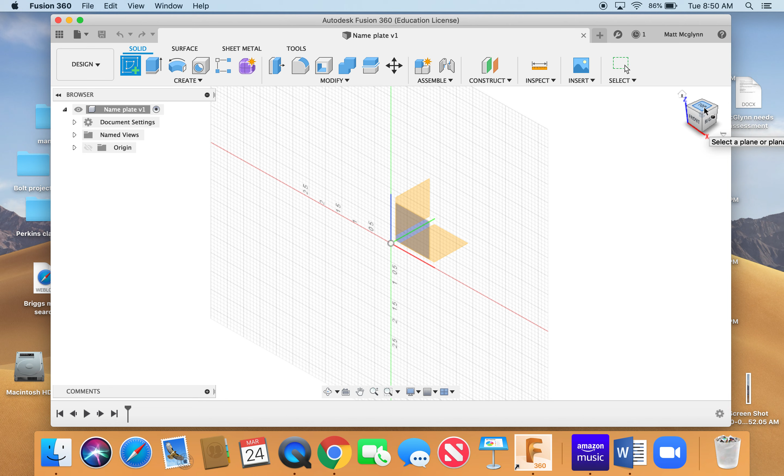Most everything that we're going to do with this one is going to be in the top view. So I'm going to click the top view, and it asks us to, the first thing you have to do when you hit Create Sketch is you have to pick a plane. This little square right here is actually our plane. So I'm going to select that. I clicked on it, and now I'm ready to draw.

If you notice now, all this stuff up here changed to different icons. We're going to start with drawing a rectangle. Now I could pick a rectangle from here, or I could also grab it from here. We want to do a 2-point rectangle.

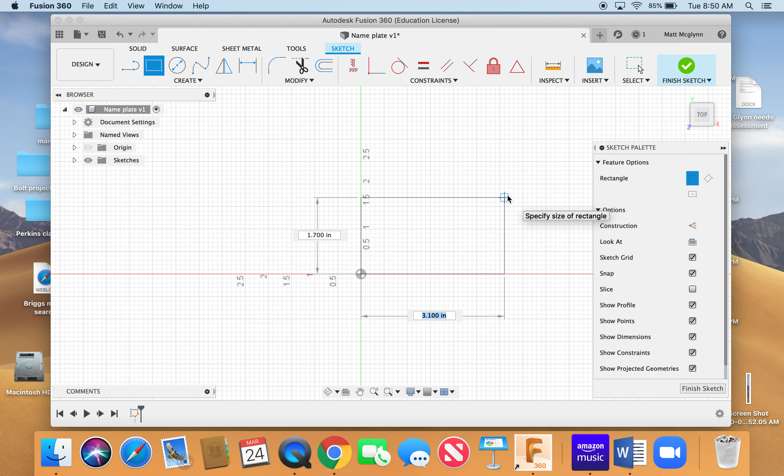I'm just going to go to the origin here, 0, 0, click on that, and start drawing out a rectangle. If you notice, it puts the size in the arrows on the dimension lines for you, and we can just type in the size that we want. So where it says 1.7 on my screen, I want you to do this too on yours: we want a 3-inch height on our rectangle. I hit Tab to get down to the other one, and then we want a 6-inch length. So now we have a 3 by 6-inch rectangle.

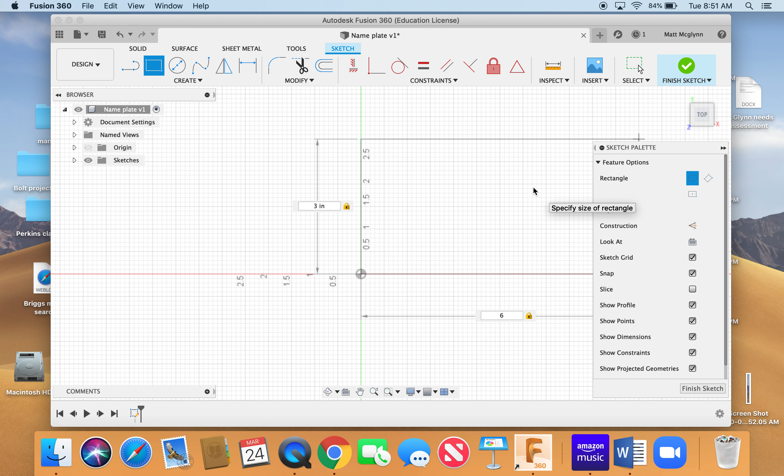After I'm done with that, I'm going to hit Return, and our rectangle's now in space here. If I put 2 fingers on my mouse pad, I can scroll and move this thing around to pan around the screen. I'm going to center it on the screen like so, and now so far we've created a 2-dimensional sketch.

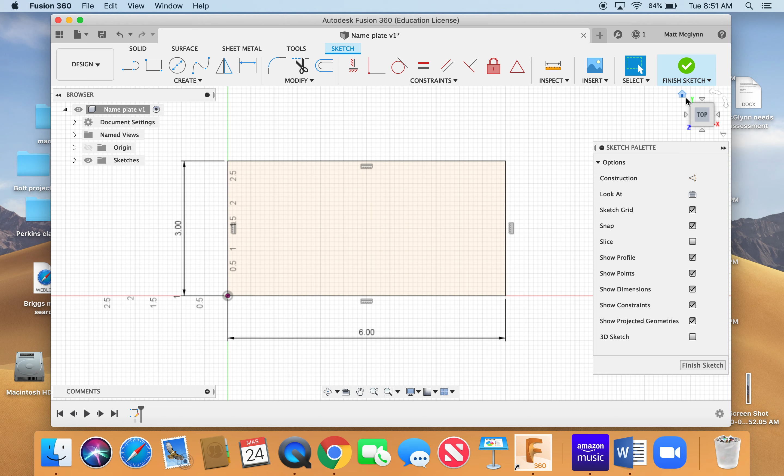If I go to Home right here, you can see that our sketch shows up as just a 2D flat part, just like it should. I'm going to go back to top here quick, and what we're going to do is turn this into a solid piece.

So I'm going to click on solid right up here, and then I'm going to hit extrude. Now extrude, if you look on the information block that pops up here, it says it adds depth to a sketch profile. So basically what we're doing is making a 2D part 3D with extrude.

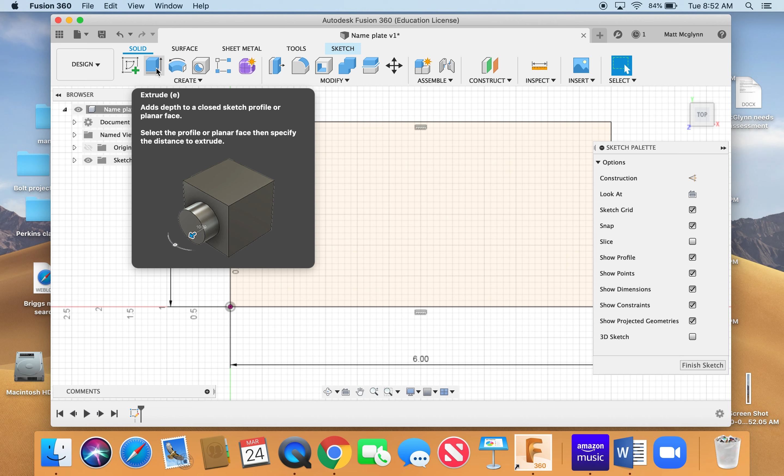So I'm going to click on extrude, and then it asks for the distance that we want to extrude. Basically we want to make our rectangle 3 inches by 6 inches, and then we're going to make it 1/2 inch thick. So I selected 1/2 inch right there, and hit OK.

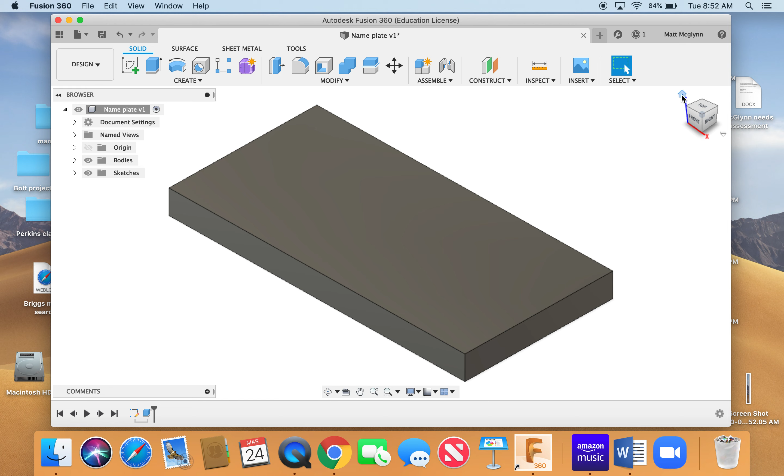Now let's go to our home view, 3-dimensional view, and you can see now we have a block. Our block extruded out. I'm going to go back to the top view again, and for some reason it goes to this view, but I'm going to use these arrows here to swing it back down to the regular top view that we had. Okay, we're going to go back to Sketch.

Once again I've got to select the plane, so I'm going to select this plane right here in the middle, and now my 2D stuff comes up again, and we're going to add some text to this.

Okay, so I clicked on text, and you can see it gives us the big A out here, and it doesn't really matter where you click on the object. I'm just going to click on there, and for the text I'm going to write my initials.

And I'm going to change the height of the text to about 1 inch. I want you all to do this, by the way. The smaller we make the text, the harder it is to cut out, so if we make it bigger, that makes it much easier.

You can see that my text is facing the wrong direction. I can change that a couple of different ways. I can swing this thing around with this point right here.

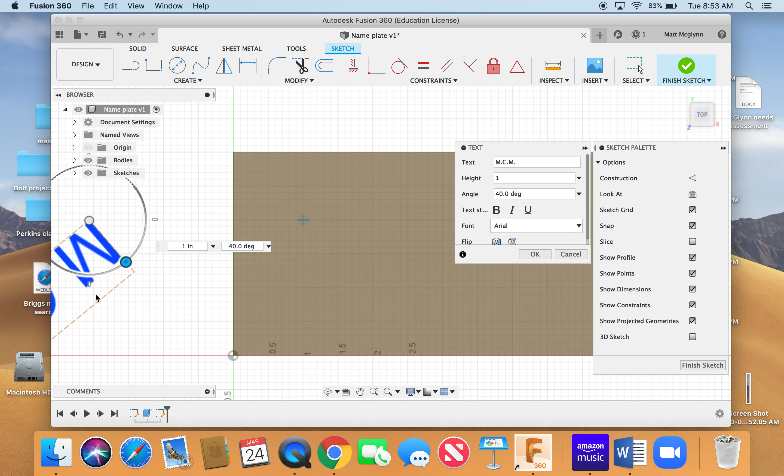I can also put the actual text angle in there. So the angles are at, if I put it at 90 degrees, let's see what it does there. That's not right. If I put it at 180, what does that do? Oh, that puts it right. So we'll put 180 in here, and that puts it in the right spot.

I want to move it. I'm going to grab onto it and move it to center it on my block here. And I'm going to hit OK. And now I have some text there.

I'm going to put a little bit more text in that too. I'm going to do this again and specify my text position. I'm just going to go down here, and we'll put in the year I graduated. Of course, you can put in the year you're going to graduate, not mine.

And once again, I'm going to do a 1 inch height on that. You can see once again the text comes in upside down. I'm going to change the angle to 180 degrees to put it in the right position, and then I'm going to move it to center it underneath the MCM that's here. I'm going to hit OK.

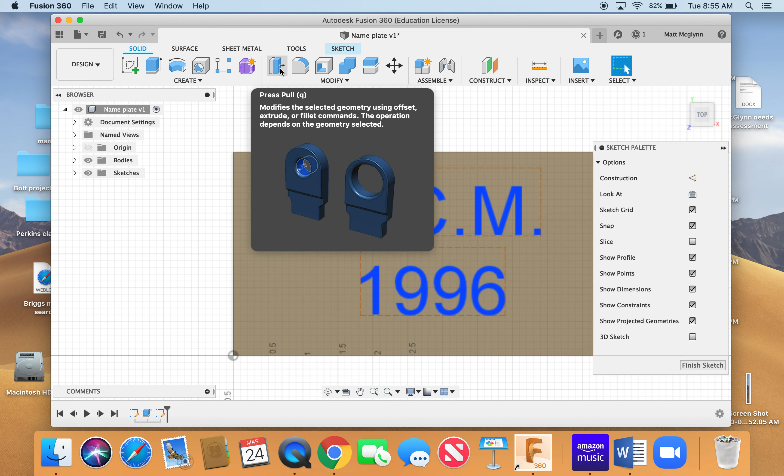So the next thing we're going to do is recess this. Once again, I'm going to go to solid, and this time we're going to use the press pull function. The press pull function works similarly to the extrude function. We're going to press this. If you can imagine pressing your hand into wet concrete or wet sand, that's literally what we're going to do with the numbers that we have up there. So I'm going to select that icon, and it's going to ask me what I want to press.

I'm going to just start with selecting MCM here, and we're not going to put it too deep. It asks for the depth, and we're going to go with maybe 20 thousandths of an inch. Now remember, we're going to be moving the opposite direction that we did when we pulled or extruded it. So instead of going positive, we're actually going to go negative. So I'm going to type in negative 0.02, because that would be 20 thousandths of an inch.

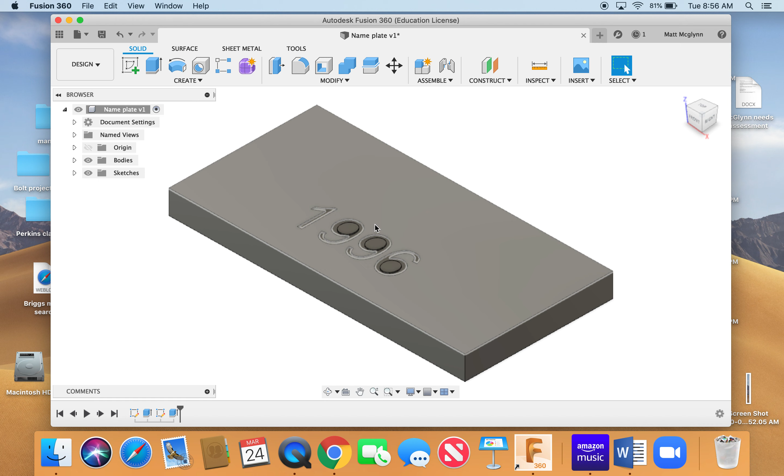And now I should be able to press that. Okay, now I clicked on this one on the bottom here, so that's the one that got pressed. Well, let's go take a look and see, did it actually press it? Yes, you can see it pushed it into the part here. I'm finding out that we may have to do the other one separately.

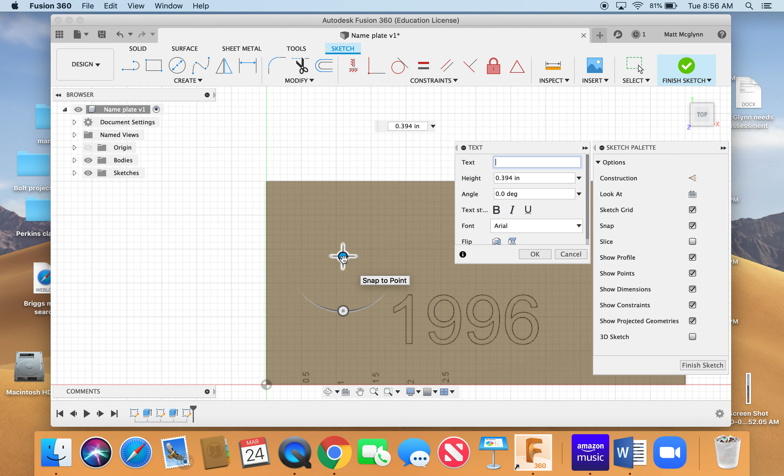So I'm going to go back to create sketch, select the plane, select this plane, and then we're going to go back to text, specify the position, and then once again I'm going to type in M.C.M, and we'll put a height of 1 inch on it, and I'm going to flip that 180 degrees again, move it over to center it.

Looks good. And then now we're going to go back to solid. I'm going to press it. Click on what I'm going to press. This is it right here. I'm going to press that negative 0.02 just like the other one. Hit OK, and let's take a look, see what we did. Hey, looks like we got it done.

So this is what I'm looking for from you today. Obviously, I don't want you to put my initials in there and my year of graduation. I want you to put your initials and your year of graduation. Play with the software a little bit. We'll see how we do.

I would appreciate some feedback from you also. If you can shoot me an email and tell me what you think, if this is going to work or not. This stuff is relatively simple, so if you do goof up, you can just start over rather than trying to mess around with the program and figure out one little feature of it.

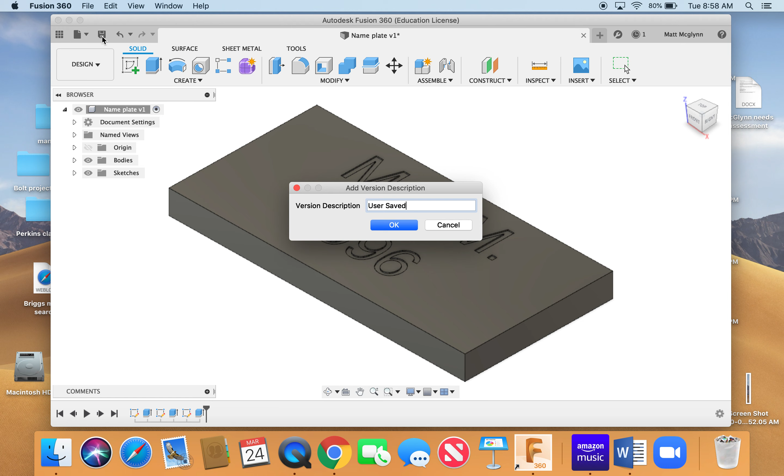After you're done, hit save. Version saved, user saved, yes, okay. Looks good, and we're all done. I'm going to close this up here.